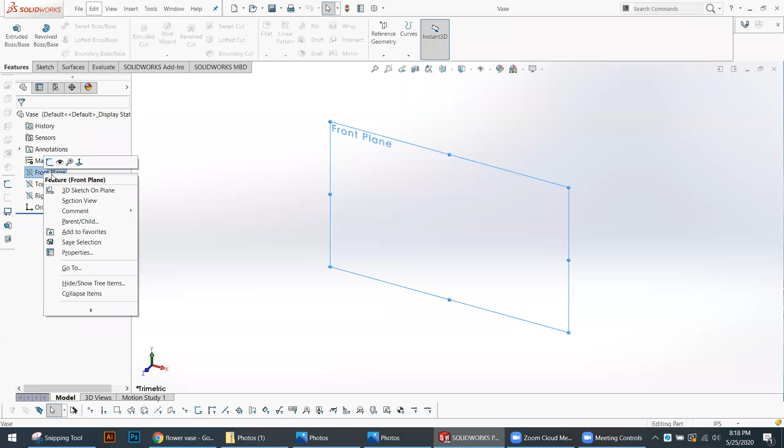Okay, so let's pick one to build today. This looks like a good one. I leave this in your folder so you guys have access to it. I click and drag it onto my desktop. Okay, now we go to our SolidWorks. Let's turn on all of our planes to make things easier.

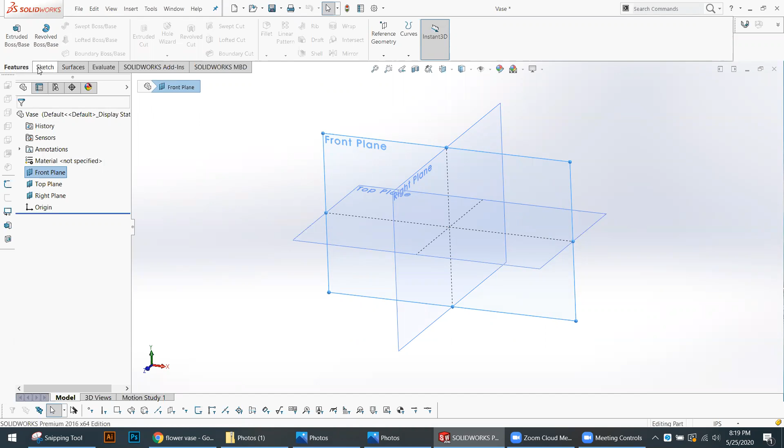So if we were to build this vase, the base would sit on the top plane, right? So it's going to be from here going up. It needs to rotate somewhere around here. So it's optional for us to build our side view sketch either on the right plane or the front plane. They will both work. So let's start with the front plane in this case. There's the front plane. I go under the Sketch tab, I click Sketch, and it shows this in front of us.

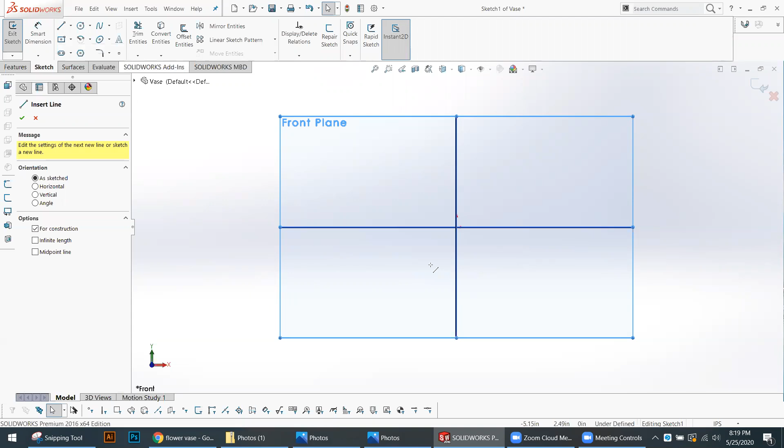So every time you know you're going to build a revolve, the first thing you do is put down a center line, because you need an axis for that shape to revolve around. Click on the center line, always start at the origin, and go up. Now press escape to come out of this line. Then we're going to measure our center line. So a vase would be about 12 inches tall. Could be shorter or taller. We're doing 12 inches for this one.

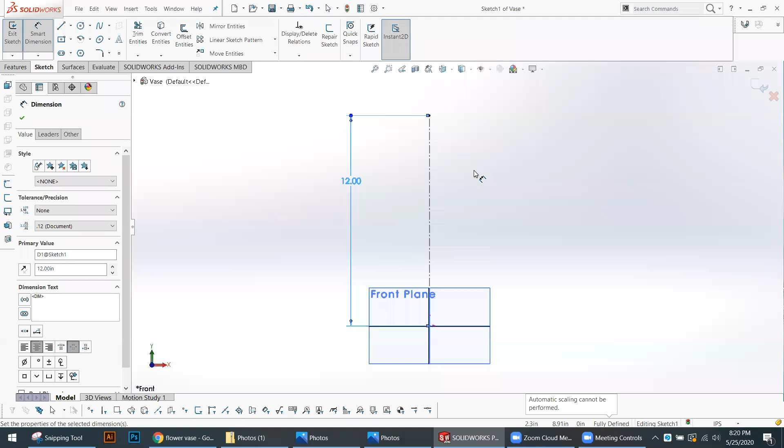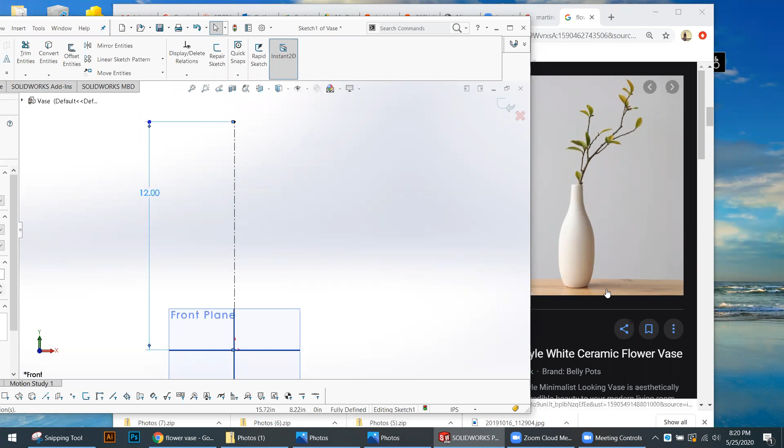And now let's look at our image and see what it looks like. So it looks like there's a flat bottom. There is almost like a very thin ellipse. There's a small curve coming out, almost flattening here, and then there's another curve, definitely flat on the top, and it closes. So notice the top is a lot smaller, maybe half the size of the bottom. So let's go with that measurement. And then start with the flat base here.

For the curved part, there are two options. We can either use arc or spline. I'm going to show you both ways. Let's go to the arc tool. There are three options under the arc tool. I'm going to use the center arc tool. With the center arc tool, there are three points that you're going to click. First one is the center. Second one is the start of your arc. Third one is the end of your arc.

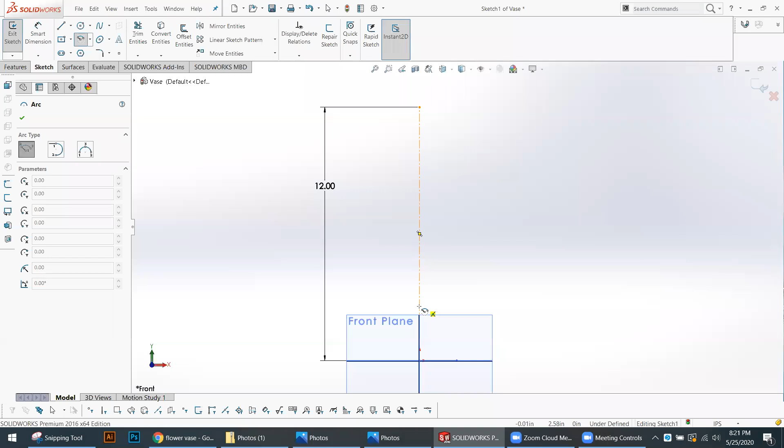So we're going to put the center right on top of our center line. First point is going to be where the end of our line is. So now it's starting out. Okay. This looks about right. Maybe a little bit less. Okay. That was our third point. So I have this arc. I can measure it.

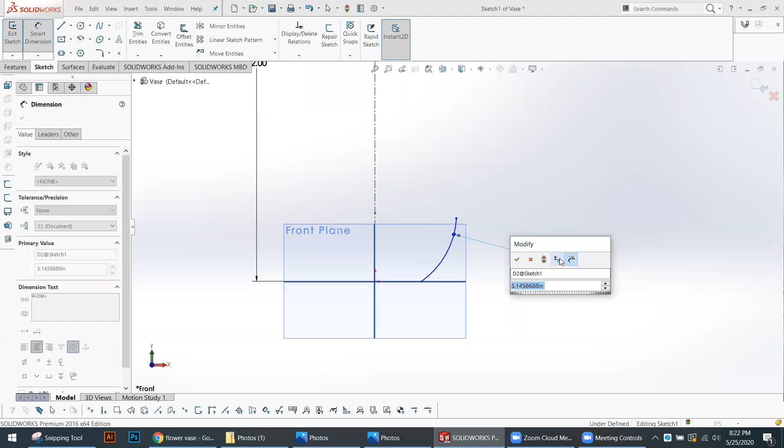So it's 3.14. We're just going to do 3 to make it easier. Also measure the bottom. Let's make this 1.75. Okay. Going back and forth, I'm looking at this. So we have this, and there's a smooth curve and then a bigger curve here.

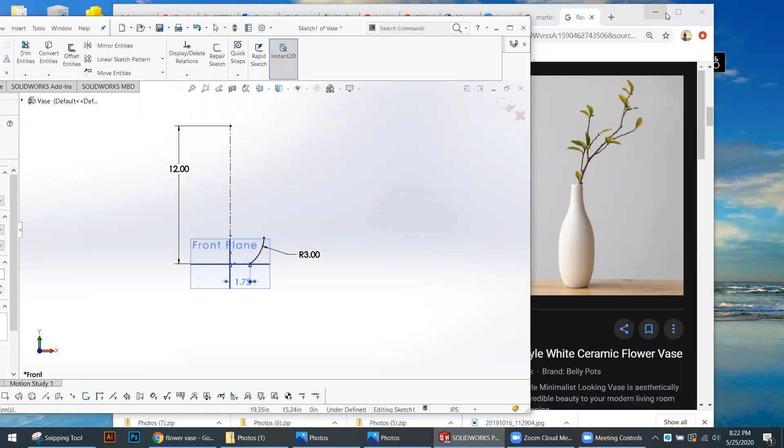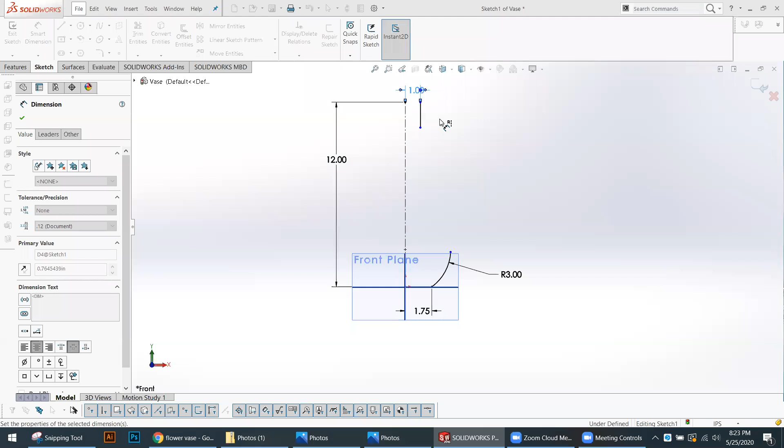So I think it's easier for me to build the top for half of that and then worry about these curves. I'm going to build this top. It's a straight line. It comes down. Let's measure this. Let's put it at 1 inch. It's still smaller than our base. And we need to make sure this is vertical. It says vertical, so it's okay. Right?

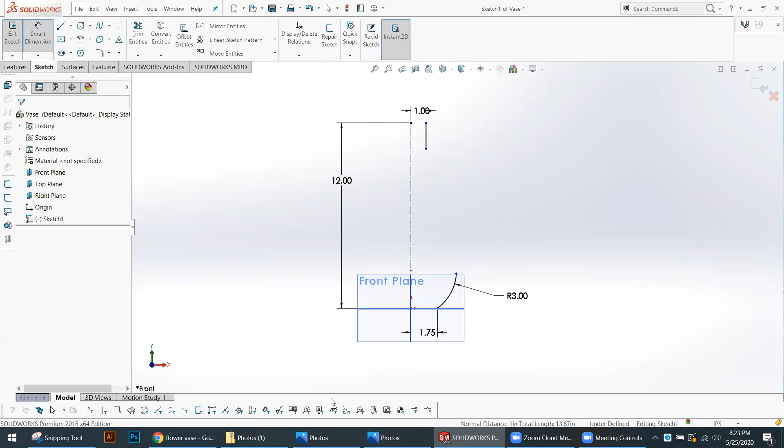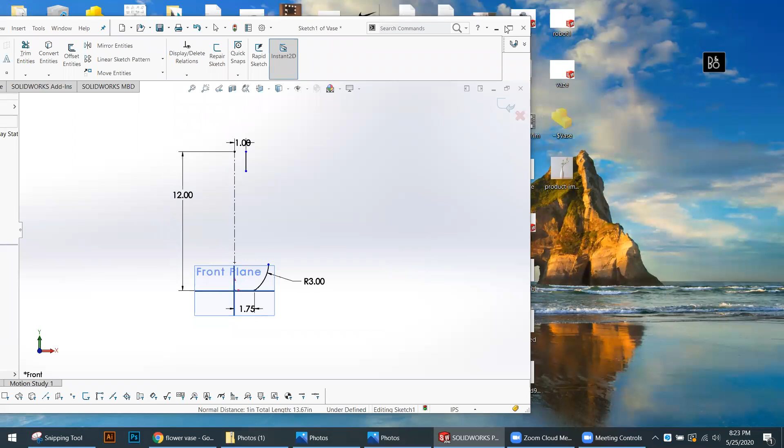Next, we need to connect this. This is like an arc that connects. So let's go back, look at our shape. So from here, it's kind of like almost a straight. It's like a small curve. And then it smooths out to here. So for this portion, it's easier to use a spline. And then from here to here, I'm going to use another arc. So let's try that. So far we've used the 3-point arc.

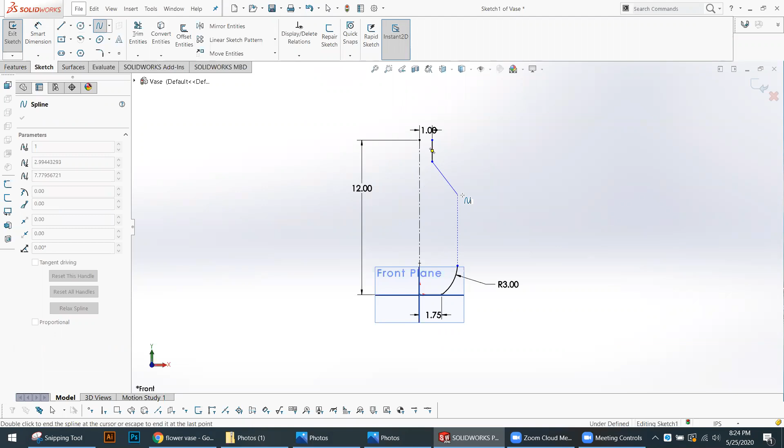We're going to do a spline here. This is a spline tool. I click once here and once try to line up with that. So splines can be very tricky to control. So I recommend to put as few points as possible. So I just did 2 points. I'm going to press escape to come out of it. I know it looks hard, but we can always come in and edit this.

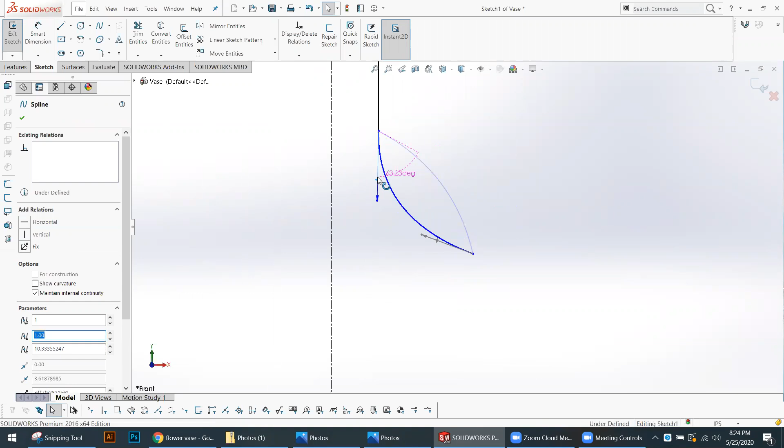When you click on this line, these two handles show up. The diamond, if you click and drag, changes the angle. The arrowhead changes the extension. Okay? So with those two, you can basically make your arc look right. Because this is coming from a vertical line, I can click on this. On the left, click vertical. So now it's going vertical.

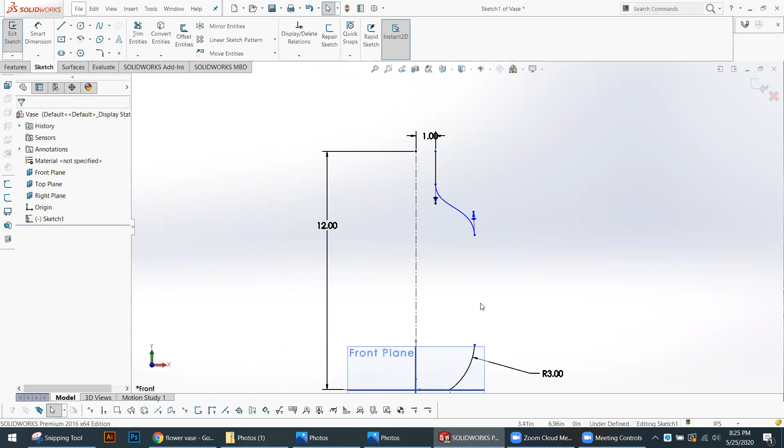Same thing with this one. We're going to connect it to an arc, right? Actually I'm not going to do vertical with this one because it doesn't go really flat. There's like a curve. So I'm going to put an arc in there. Let's go under our arcs. There is something called a 3-point arc. A 3-point arc has 3 points. So we start with the start of the arc. Second one would be the end of the arc. Third one would be the radius.

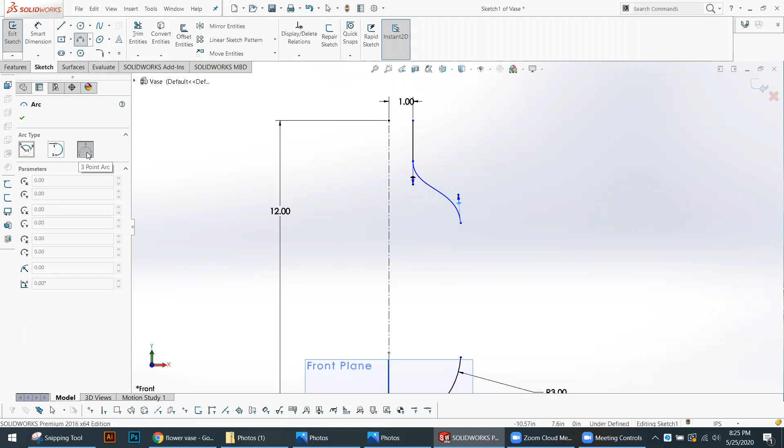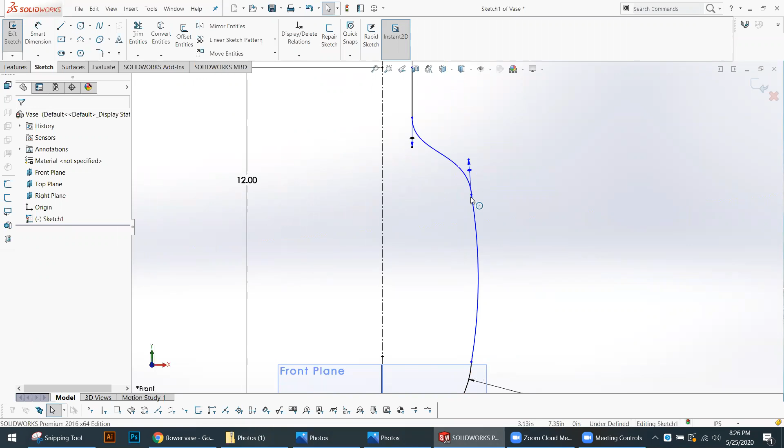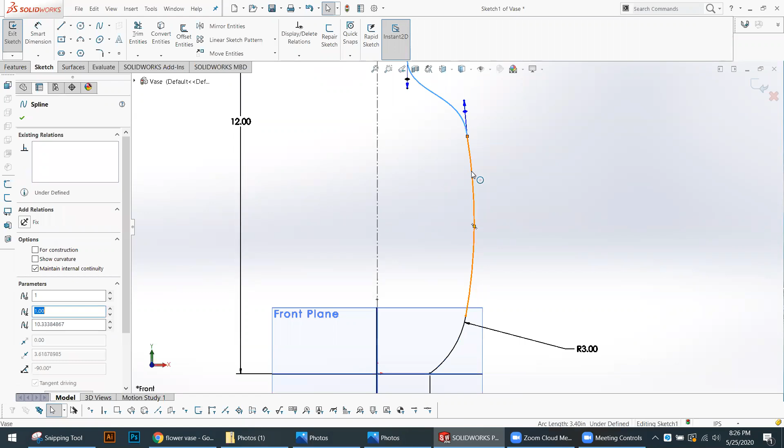So here's our first point, our second point. As you see, this is going to be our third point. Okay. So now I need to make sure this is smooth. It looks bumpy. One way to make these smooth, you can set these tangent to each other. I click the first arc, hold shift, click the second. And on the left, you have the tangent option. Select it. So now it's tangent. Same thing with this. We click spline, click the arc, set tangent. So now if you look at it, it's a lot smoother.

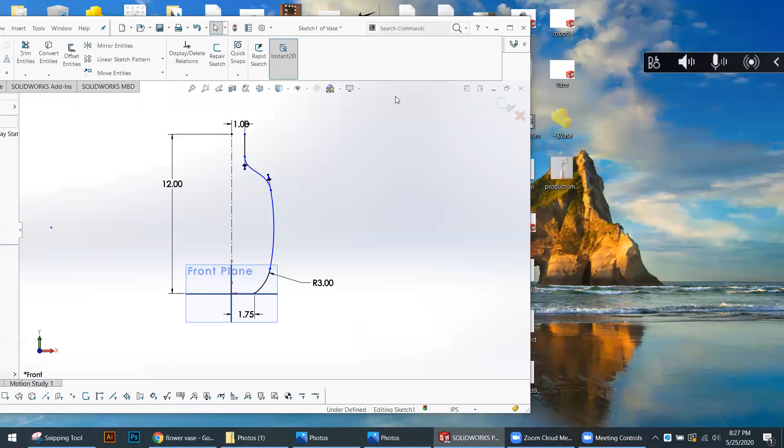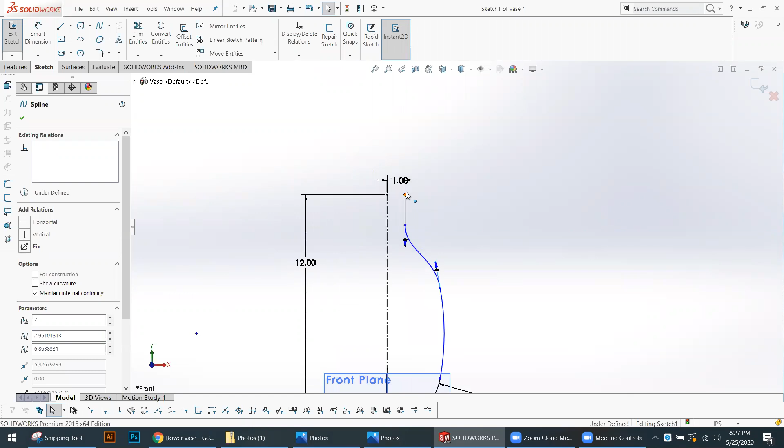Let me go back to my image. I think this image was a little bit taller. This portion I think is a lot taller than what I have. You guys see I have like a really quick turnaround. So let's move this down. There we go. So now it's like an easier transition. Looks better. Let me go down with this one as well a little bit. Okay, looks good.

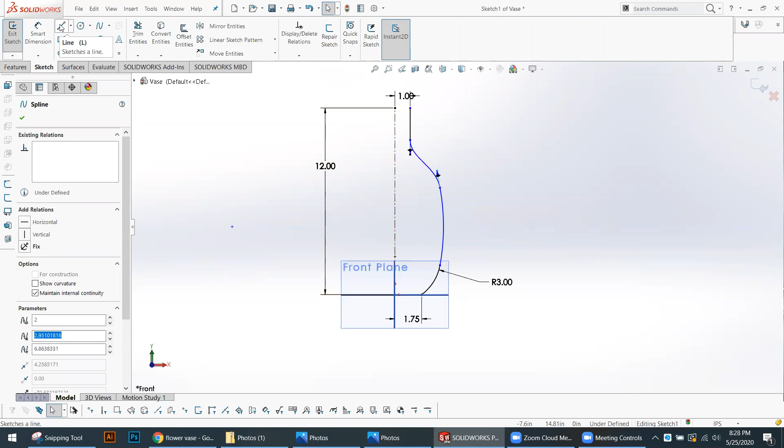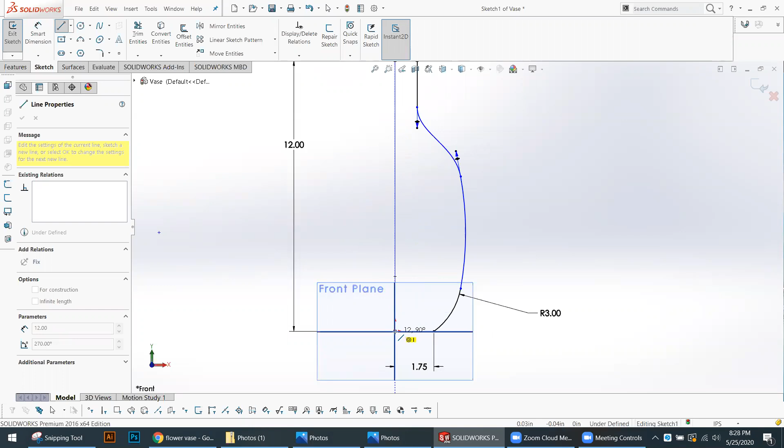One side is done, but our sketch is open. As you can see, we have just one line up in the air. So we need to finish our sketch and close a path. I go to the line tool, click this, come to the center, and come over the center line. Notice there is a center line, but because it's dotted, it doesn't count as a line to close the geometry. So I would have to come over to the solid line, go right there where that yellow dot shows. I know they're intersecting. I select and escape.

So on the newer versions of SolidWorks, every time you have a closed path, the color changes to a dark blue or maybe like a gray color. That's how you know your path is open or closed. You need a closed path to revolve or to do any 3D operation. So this looks done. I kind of want to do a smoother top for whatever reason. Okay, that looks better to me.

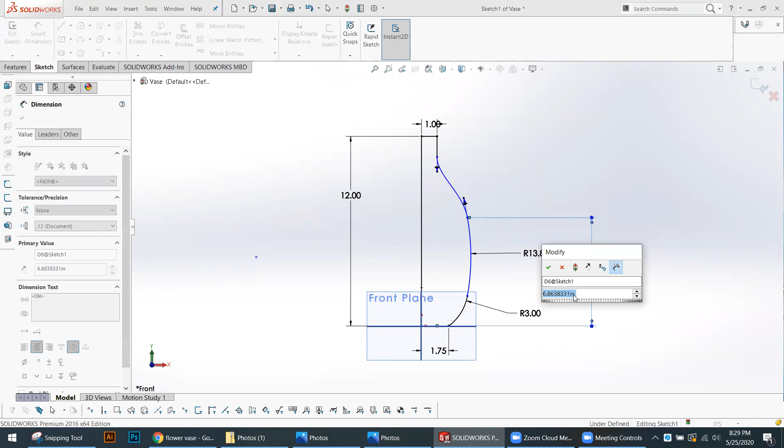Okay, let me put some measurements on these. So this is also an arc. This is 13. I do 13.8, so it's more viewable. This height we can measure, and also this height we can measure. Let's do 1.25. Okay, and also maybe this height. Oh, because I have that and I have this, it's overdoing it. So we cancel that. Now the width, 3.

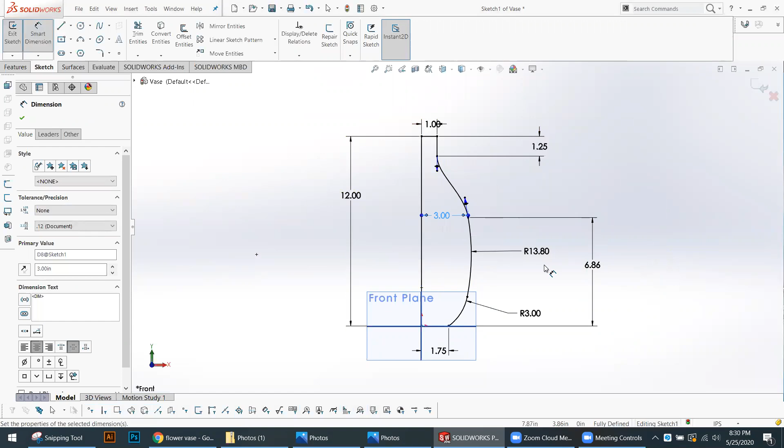Okay, now we have it all black, so the whole sketch is defined and we can revolve it. Come out of the sketch mode. Our sketch one shows here. We know the sketch is done. We can rotate and look at it. It's half.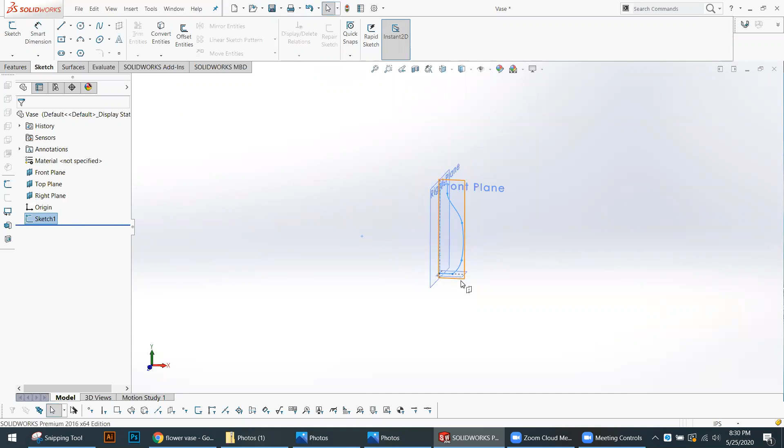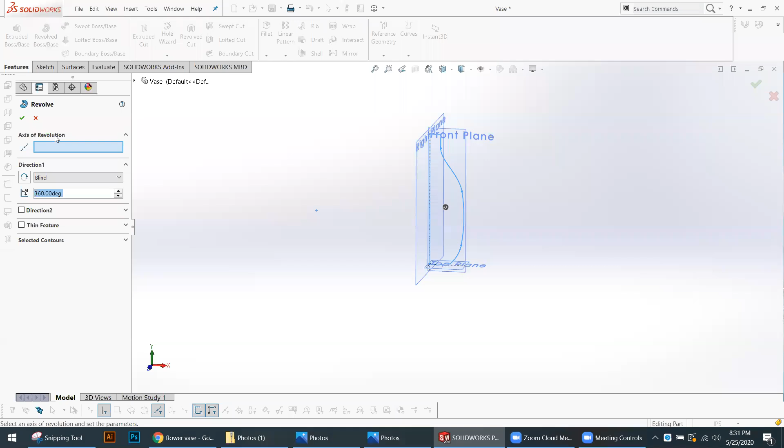And now we go under features, select the second option, which is revolve. To make sure the sketch is selected, I'm going to click revolve. So when I click that, the first question it asks me is, which one's your axis of revolution? It may be that your computer will automatically pick up your dotted line. It may not. So you'll have both options.

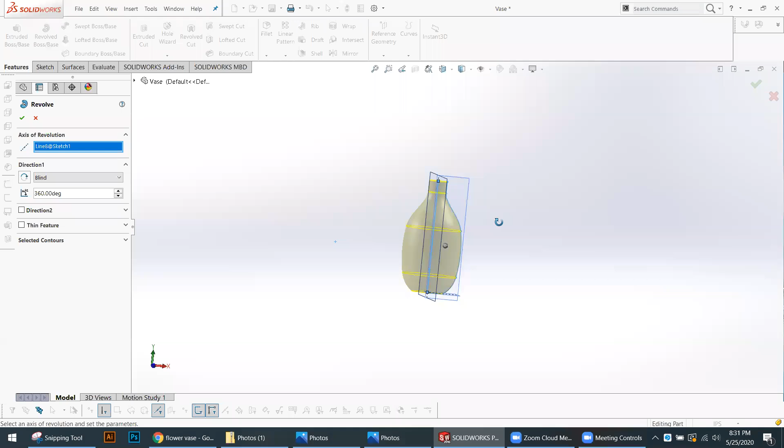So whichever line I pick, it will revolve the shape around that. So I click the center one. So now I realize this form is a lot chubbier than what we were looking at. So our form should have been a lot taller, which is okay. So I'll show you guys on the next assignment how to get your form as close as possible to your inspiration. But this is also a way of learning that just eyeballing is not enough.

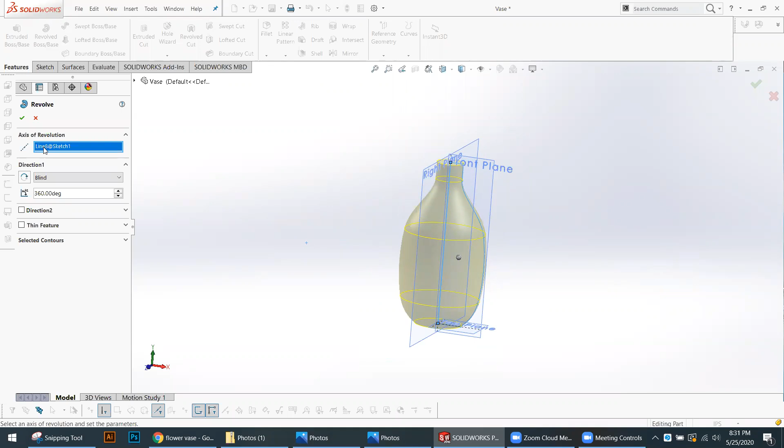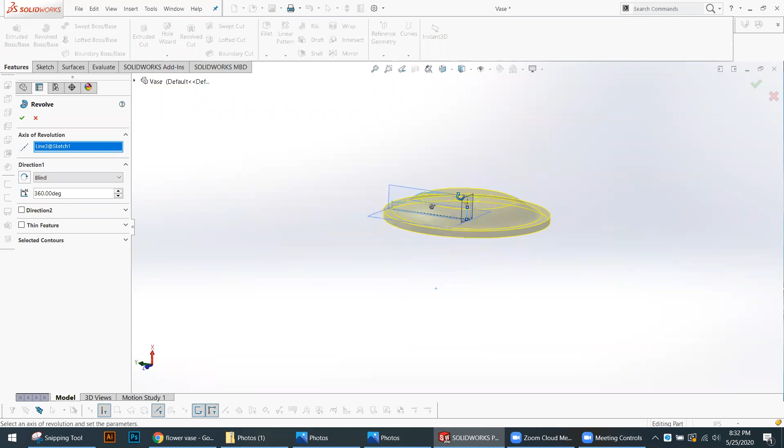Okay, so I selected the center line and revolved the shape around the center line. If I select this line for axis of rotation, it revolves the shape that way. Any flat line I have, it could act as a center of rotation. So it's important that you know what it's asking for and what you need to choose. Right?

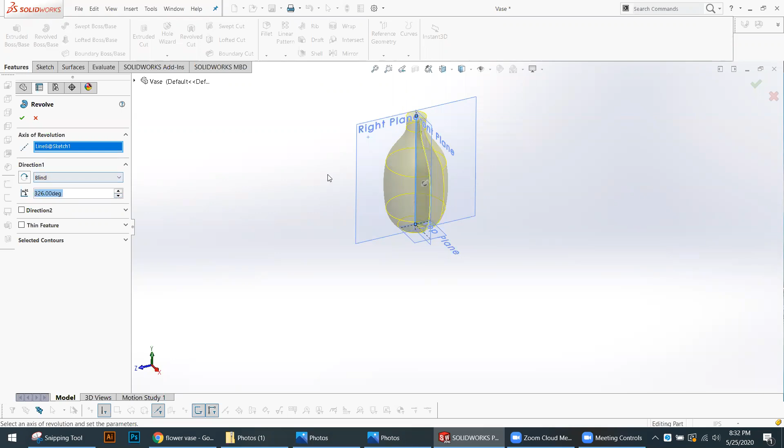Now I come down here. Here it says 360 degrees. So let's go lower with that and see what happens. Okay, so now we are 326. So it's revolving from the sketch going 326 degrees all the way to the side. Okay, let's put this at 90 degrees. So that's revolving 90 degrees.

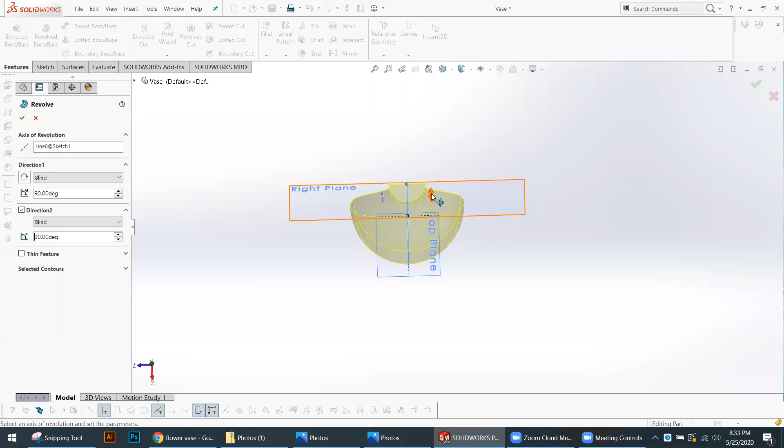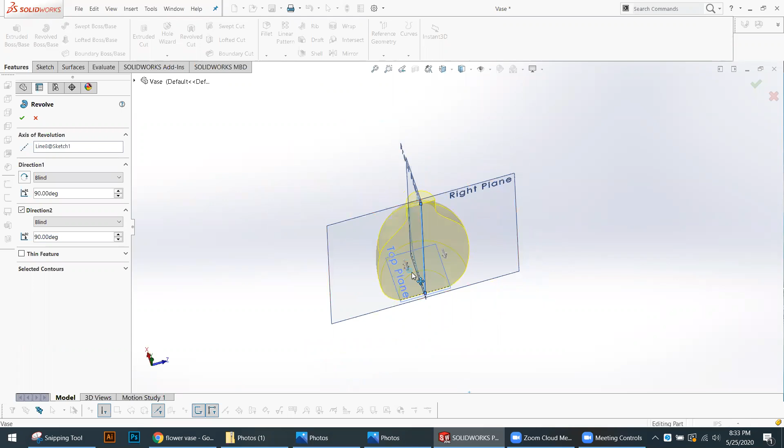And then we can add a second direction. So like that. This is our second direction. So right now it's at 23. We can go all the way up to 90 if we wanted to, right? So I want you guys to know you don't have to build a full revolve. You can only do portional, like semi-revolves, depending on the need of your geometry. Okay, I'm going to go back to normal 360 degrees because we want the full revolve. There we go, and press OK.

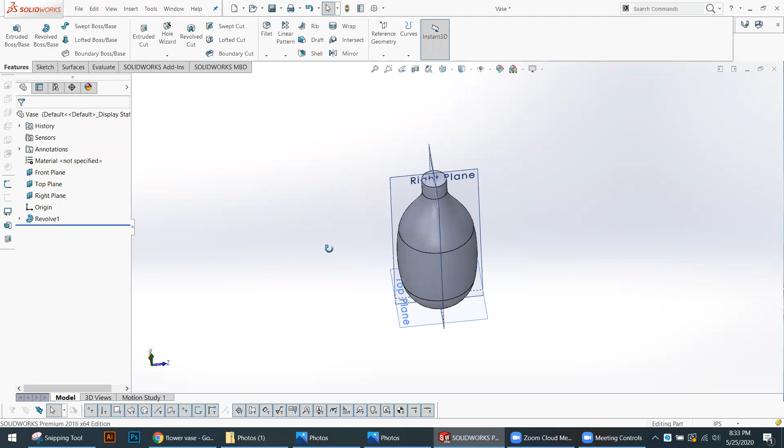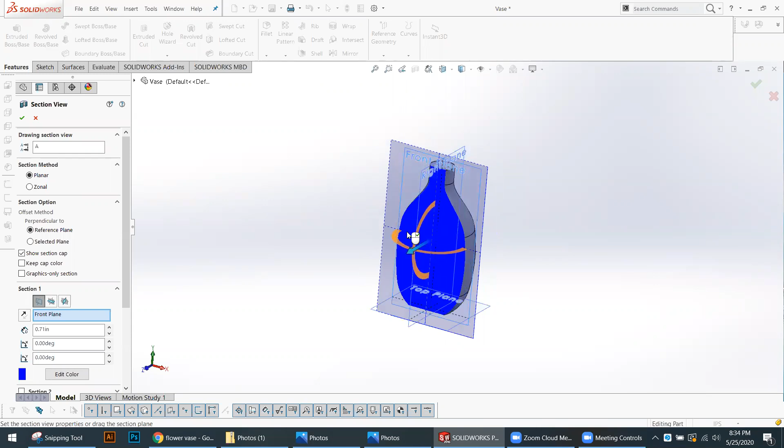Right, so we have our vase. However, if I look inside, I click the section tool on the front. The inside is completely solid. Right, you can't put any flower in this, right? So we need to hollow it out. Let's look at this. To hollow any shape out, there is a feature called shell. Come all the way in the features, almost over the middle, select shell.

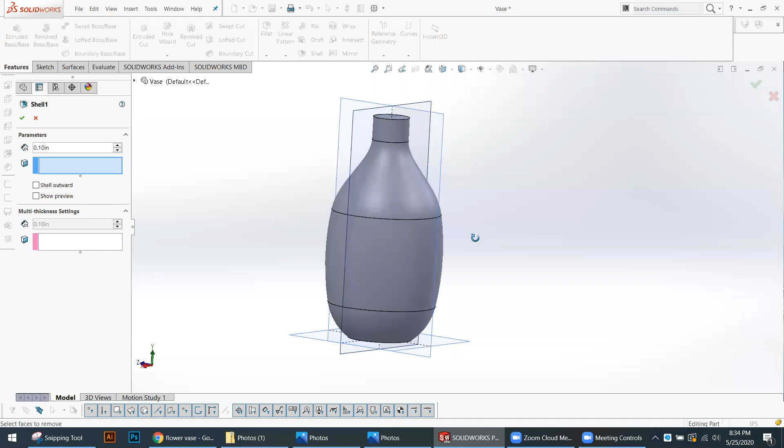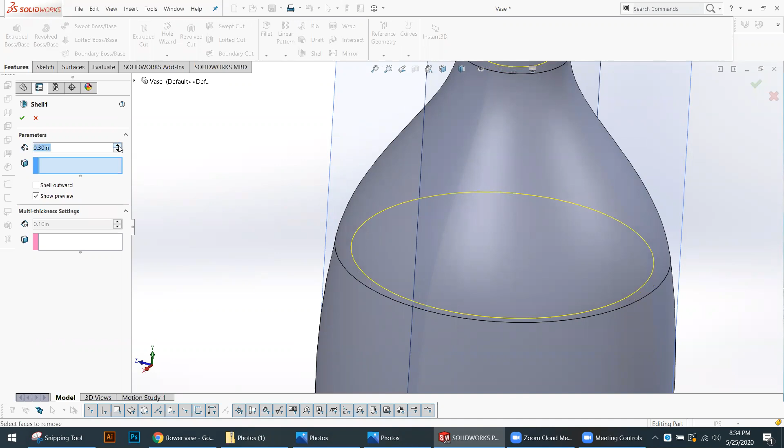Okay, so if you select shell without selecting any part of your shape, it would shell out the inside. So I'm going to click show preview. You can see it's previewing you the hollow inside part. This parameter here, this is the wall thickness. So if you look, that is about 0.1. If I go up with it, it's 0.2, 0.3. So it's basically leaving a 0.3 wall all around.

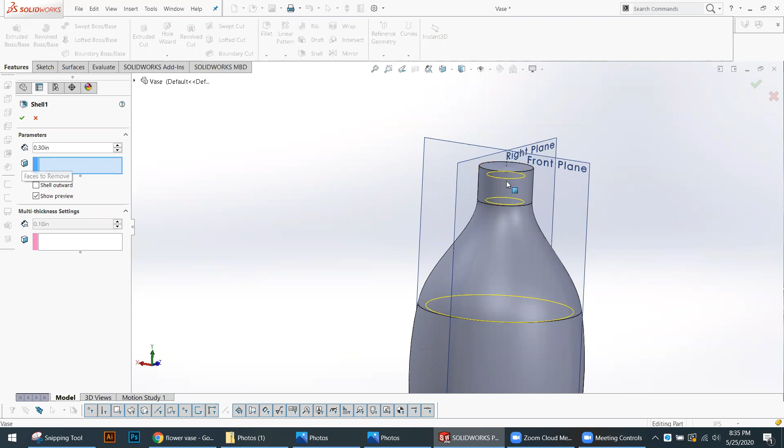However, with the walls, with the base, the top needs to be open. We don't want a closed top. So we're going to come on the top here, where it's blue, it has a face, and select the top. When you do that, it's going to open up whatever face you picked up. So now, as you see, the indicator is right at the edge of this base. 0.3 is really thick, so I'm going to go to 0.15. Okay, that looks about right.

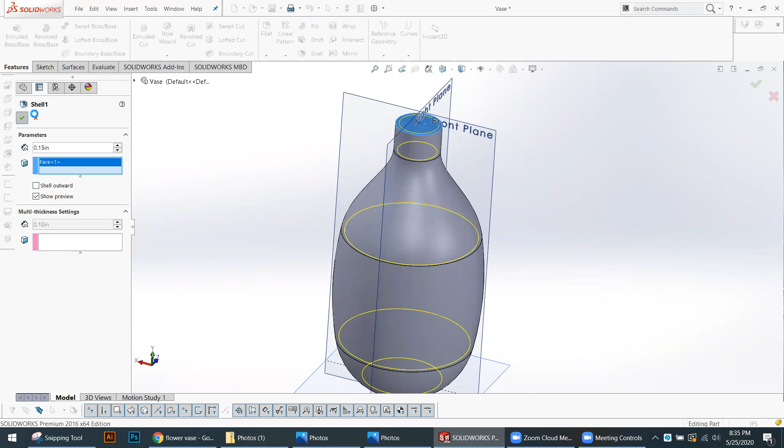You press OK. Right, let's see, that's hollow inside. We can check with this one too. You see that? It's a great way of checking. It's good for you guys to get used to it. Okay. So we have the shape done.

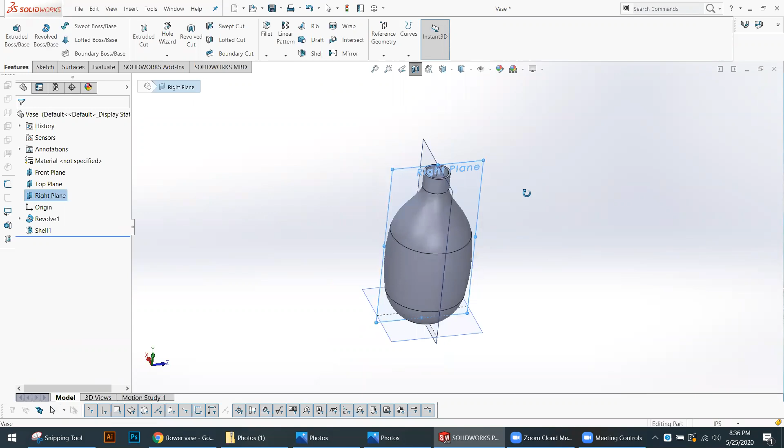One thing I would like to also show you is how to put letters on the outside. Let's say you want to write something. We're going to go to the right plane. Either plane that crosses this will work, right plane or front plane. That's a sketch. Control 8. Okay. To write, you need a baseline to write on top of. When I say write, I mean letter.

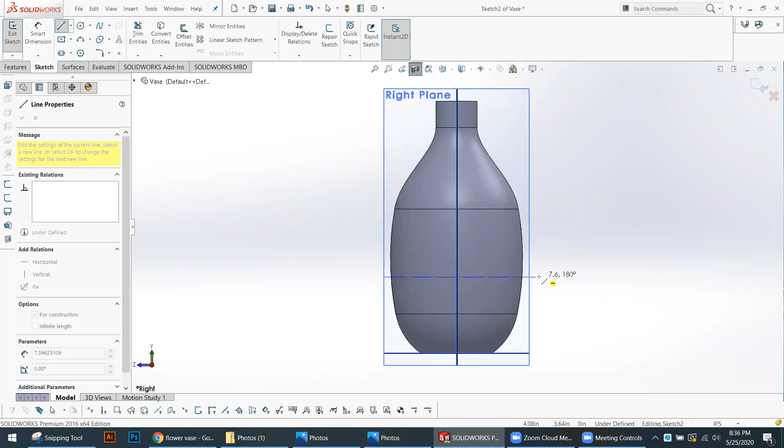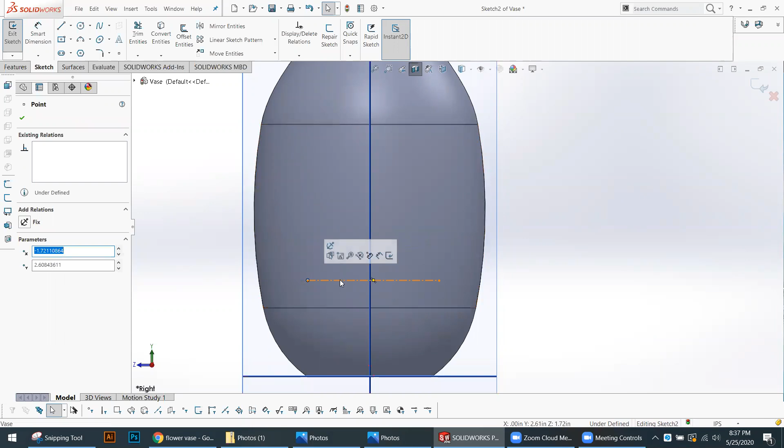So let's put a center line, a dotted line basically, there we go. So as you notice, I try not to go to the edges because it will click to the edge. I went outside. Now I'm going to try to center my line where I want my writing to be. So that looks about right. I can always come back and move this around. That's fine.

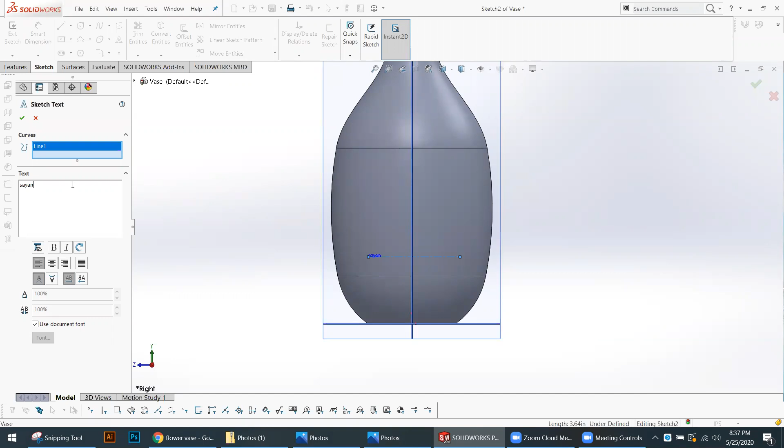Okay, now that we have this line, I'm going to go up on the top where there's an A. This is the text tool. So click on that. First thing it's asking is curve. Basically, what should it write on top of? We're going to pick this. So now our text is going to go on top of this line. So I want you to write your name. I write mine. So I wrote it. It's super tiny. So I need it to be a lot bigger.

To make this larger, we go here where it says use document font. Uncheck that and we click font. So it's best to use bold and very open fonts. Basically, you might think of each letter as a sketch. So if they overlap, it's not gonna work.

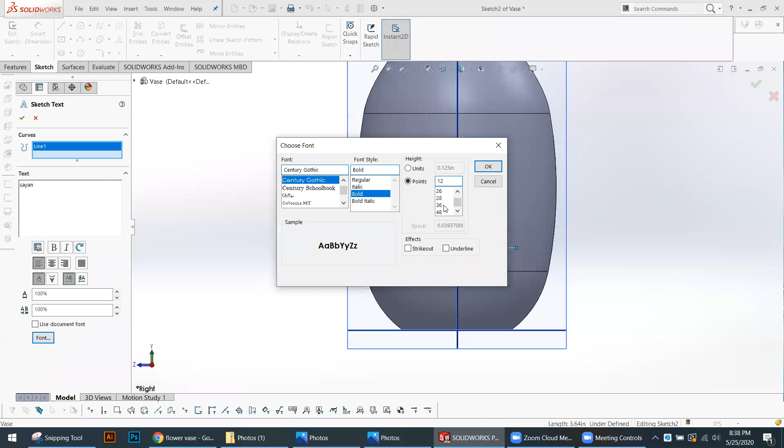I want to bold. Here's the point. So I'm gonna go to maybe 36. Let's see. Okay, it's still pretty tiny, right? And go back. Let's do 72. That's much better. And go to all caps. All right, that looks good. Now I can center it too because I can see the whole name.

Okay, if you want to move and center this, you have to come out of the sketch text. You cannot move your line while you're there. So if I select this line, it doesn't know where to put the text. It drops it down to the base. So I pick this again, check OK.

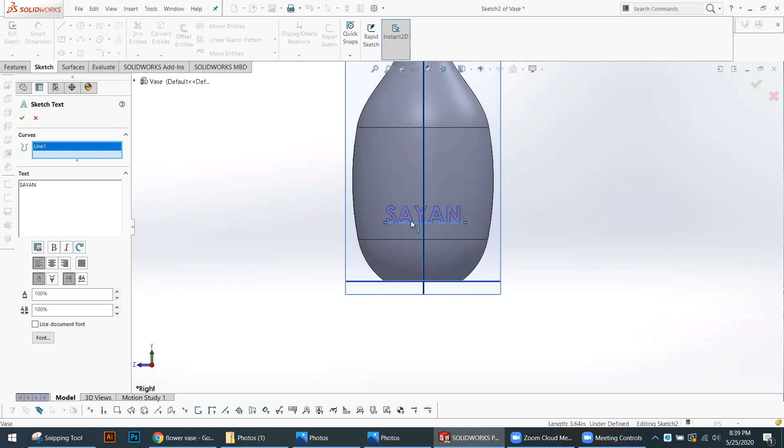So as you see, each letter is a sketch. For me, it's a closed path. Nothing is crossing over. So don't pick script writing. You will have problems trying to extrude those or boss those or cut those. So you want very open and clean text.

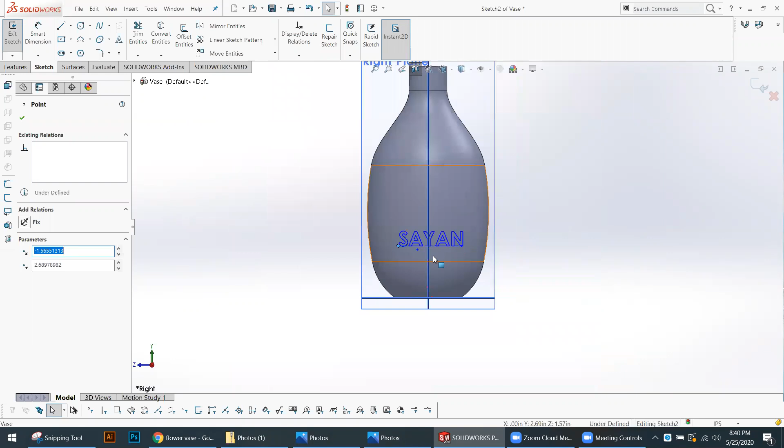Now, if I come here, move my line, the whole thing moves. Move this way a bit more. Too much. All right, that's good enough. And maybe lower it there. Okay, it's bothering me. I'm gonna come that way a bit more. Okay, very good.

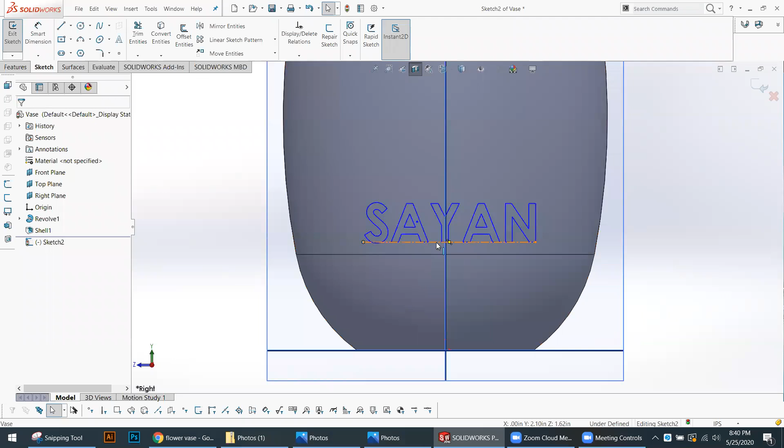So now I have, this is basically my sketch. I have my sketch. Again, make sure this line is a dotted line. It's not solid. Now I want to extrude this. So if you notice, this sketch is right inside this piece, right? If I extrude, it's going to extrude out from here and come out here. So it's going to be inside my bottle. So let's look at that.

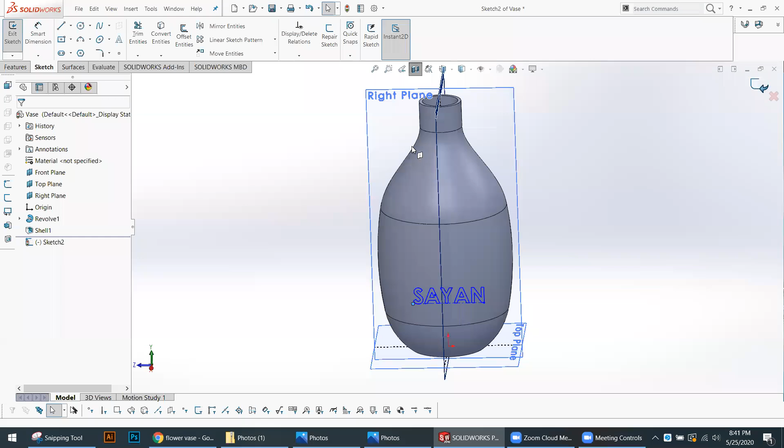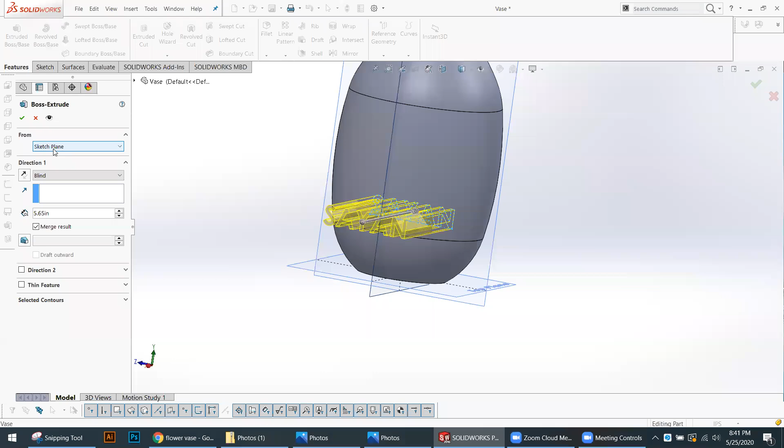Out of the sketch, my sketch is selected. Go into feature, extrusion, and as you see, it's coming from that center. And we don't want that, we just want it to come on top of here, right? So here on the top where it says from, so it says where should it start the extrusion from? From the front, there is sketch plane. It's basically starting at the plane where the sketch is on.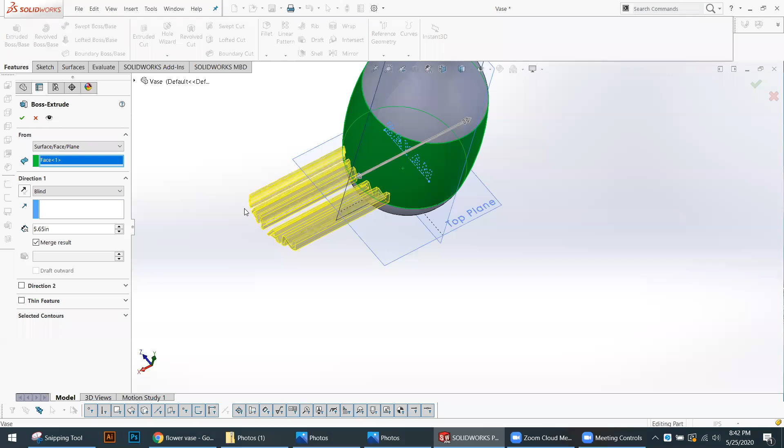But we don't want it to start there. We want it to start right at the edge of this base. So I'm going to go here and click surface or face or plane and select this. So now if you see, it started going out from this edge and it's going 5 inches out. It's too much. It's definitely going to break off. So we're going to go and make it maybe 0.1. Let's see. Okay, that looks much better. All right. And very good.

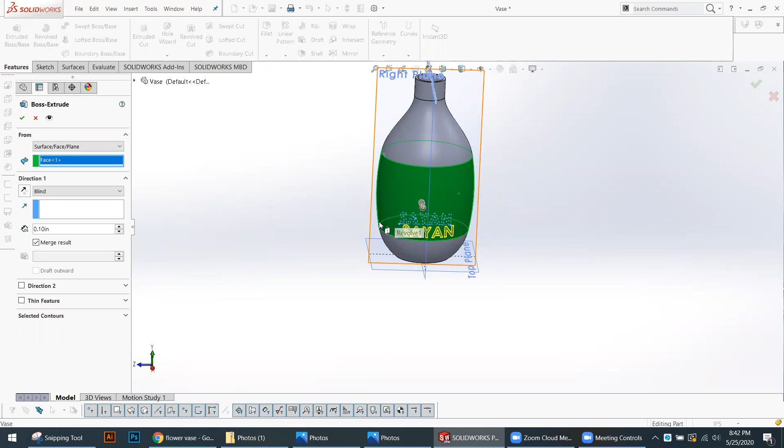Something to pay attention to. If your piece doesn't come out, it may be that your text is too close to the edges and it's stretching out too much. Or your text is not like a complete sketch for each one of them. Or you may have it go opposite, going backwards. So that could be a possibility. You just have to change direction here.

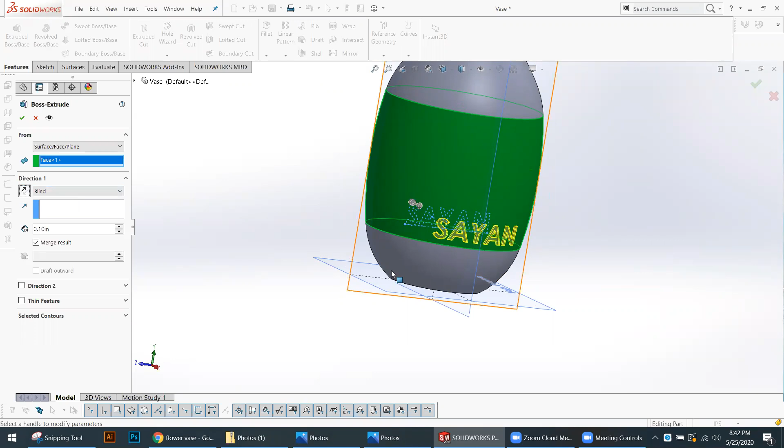If you click this, it changes direction. Here, sorry. Pay attention to that extrude boss. See, now it's going inside the body. Now it's going outside. Okay. So this looks good. Say okay. And our shape is okay.

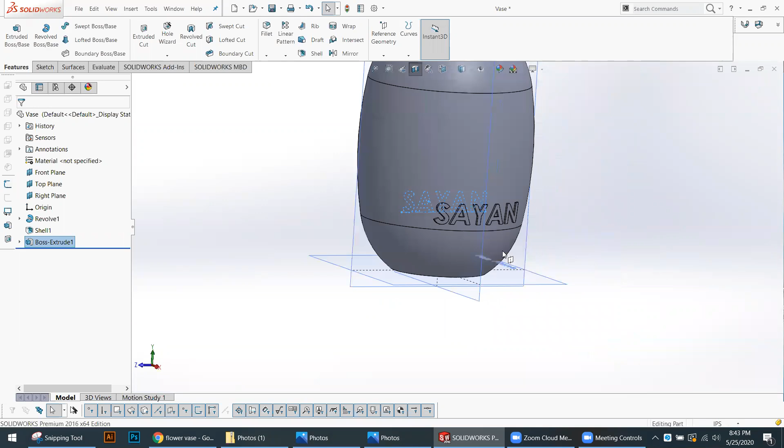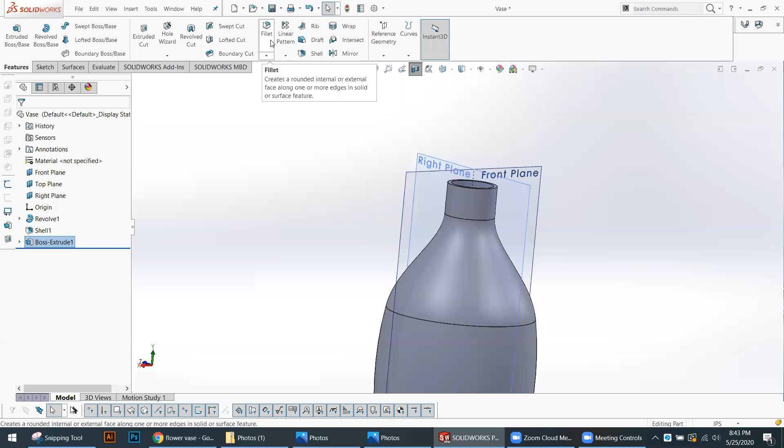One more thing to get used to, every time you build a shape, you would not leave any sharp edges. For example, these, because of course it's not useful, it's really rough. So under feature, there is a tool called fillet, which rounds your edges. I click that. At the end of every modeling, you take this step.

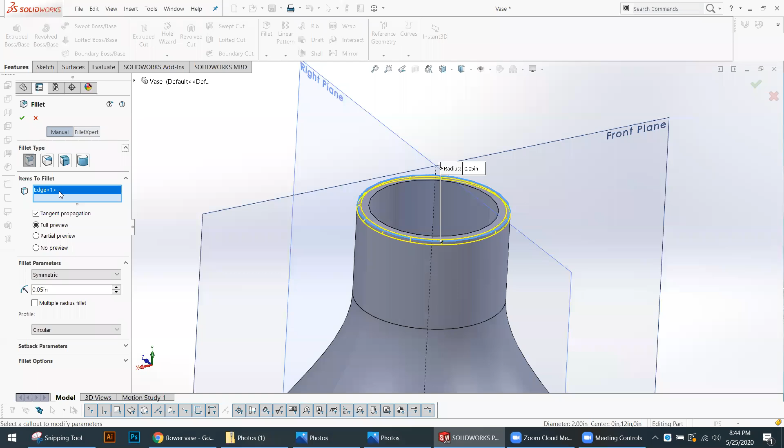If I click any edge, you see a right edge, it would give the radius, but the radius is here. So right now it's at 0.1. You can write 0.05 and click here outside and it makes it smaller. You can either select edges or click a whole face. So if I pick this, you see this is the face, and delete the first one. That face has two sides, two edges, so now it's rounding both of those.

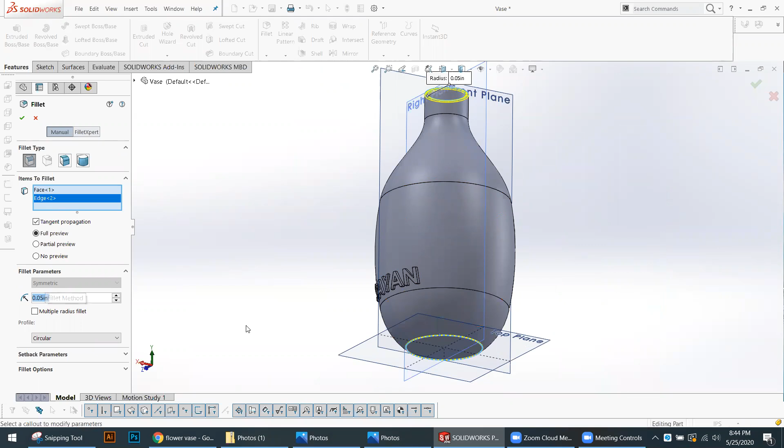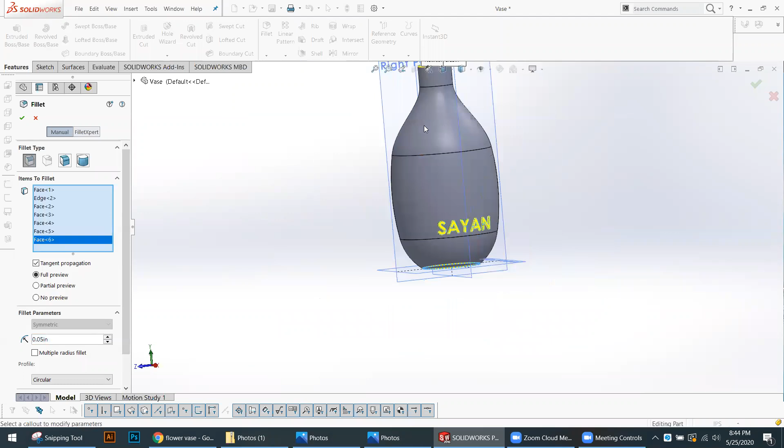If yours doesn't work, it may be that this fillet that you picked, the number could be too big or too small. So right now this 0.05 is still working, it's just really small. I could do this one too. Okay, it's working. Okay, here we go. All good. And we're done. Make sure you save your file. And that's about it.